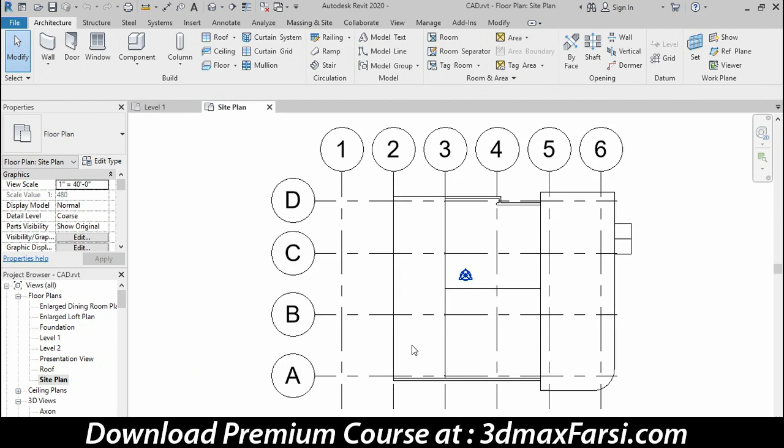So I'm going to switch views. I'll come over here on the project browser and go to my site plan view. You can see that it comes in at a much smaller scale, and I want to give myself a little bit of room to work, so I'll put my mouse in the middle of the screen and roll down a couple of clicks to zoom out.

To bring in a file created in another CAD program, we go to the Insert tab and we have two options: Link CAD and Import CAD. Generally speaking, Link CAD is considered the better choice, and one of its major advantages is that if the file I'm linking gets updated, I can simply reload that link and capture any of the changes.

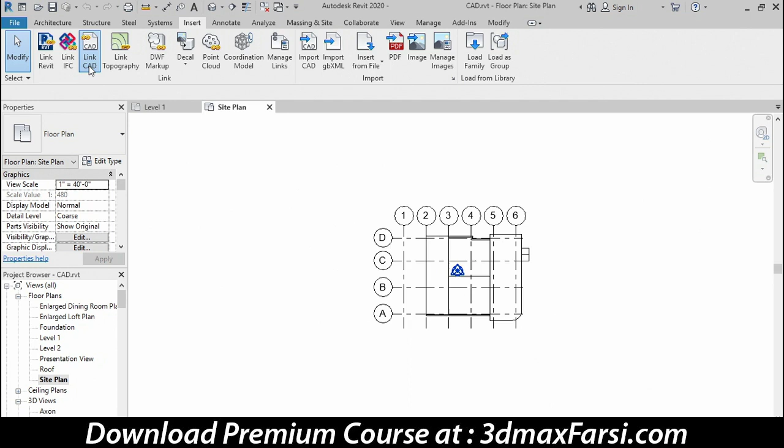So that tends to be a nicer workflow than having to completely re-import the data again. Let me go ahead and click Link CAD, and I'll select the DWG file that was sent to me by my civil engineer.

Now let's talk about a few of the settings at the bottom of the dialog. The first is files of type. I'm bringing in a DWG, but notice it supports many other formats as well, like MicroStation files or SketchUp files, so you can use the same basic method to bring in those files.

In the middle here there are several different settings. CAD files are typically in color, so here you could either preserve those colors or force them all to black and white. I'll accept the default and preserve them.

CAD files are typically organized into layers or levels. You can bring in all of those layers or some of them. I tend to bring in all of them, and then if there's a layer I don't want to see, I'll hide it later.

CAD files can be created in any unit of measure, so if you know the unit of measure you can choose it off the list here, or AutoDetect usually does a pretty good job. I typically default to that, and then if I need to scale it later, we can look into that.

Correct lines that are slightly off axis is a setting that tries to correct inaccuracies related to really long decimal place values. That can work pretty well for smaller scale files like this particular file, but if you have a very large, detailed site plan, you might want to turn this off because it might overcorrect things. I'll leave it turned on in this case.

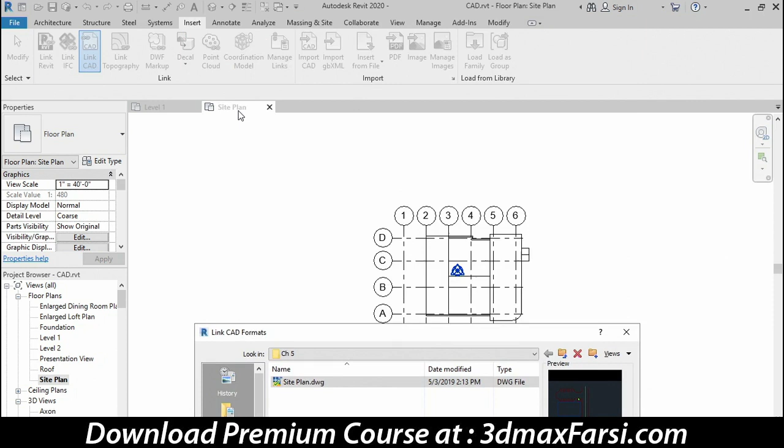Now, current view only is a really interesting setting. If I checked it, the CAD file would only show in the site plan view I have open, in no other view. If I uncheck it, it will treat it like part of the model and show everywhere—other floor plans, 3D views, what have you. I'm going to leave it unchecked, and I'll show you what that looks like in a few moments.

Now for positioning: if the two files have been coordinated with one another and share a common origin, then origin to origin can be a nice setting. These two files have not been coordinated, so the origin in the CAD file does not match the origin of the Revit file. You're welcome to try it and you'll see what I mean, then you can just undo. But in this case, I'm going to choose the more generic option of center to center.

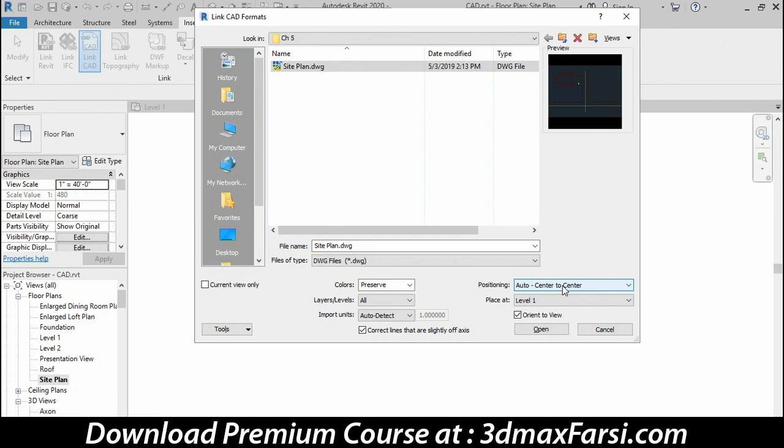Center to center is useful when you're not sure if the two files have been coordinated, or you're pretty sure they haven't, and you just want to make sure the CAD file comes in on screen so you can find it easily. It lines up the center of the CAD file with the center of the Revit project, and when I click open, it just drops right into the screen.

Clearly we now need to move this file because this site plan does not match the location of the building. This blue dashed box represents the property line of the building, so I need that to coordinate a little bit better with my building geometry.

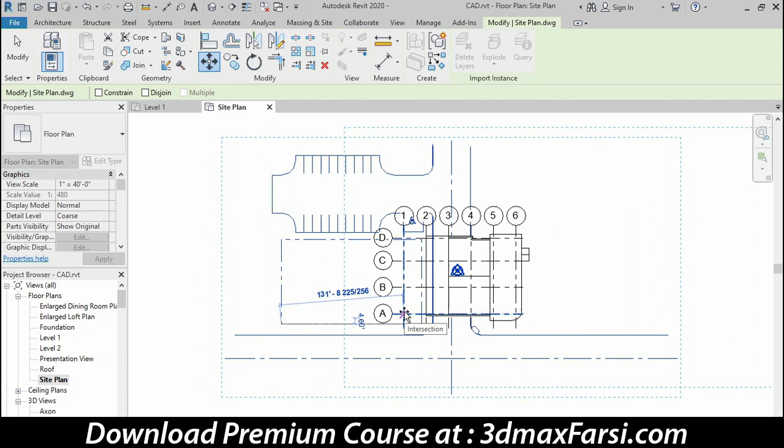I can click anywhere on the CAD file and select it, go to the move command, and start moving at some convenient start point. I'll pick the lower left-hand corner of this property line, then move that to the intersection of column grids A and 1, and click at that intersection. Let's zoom in a little bit.

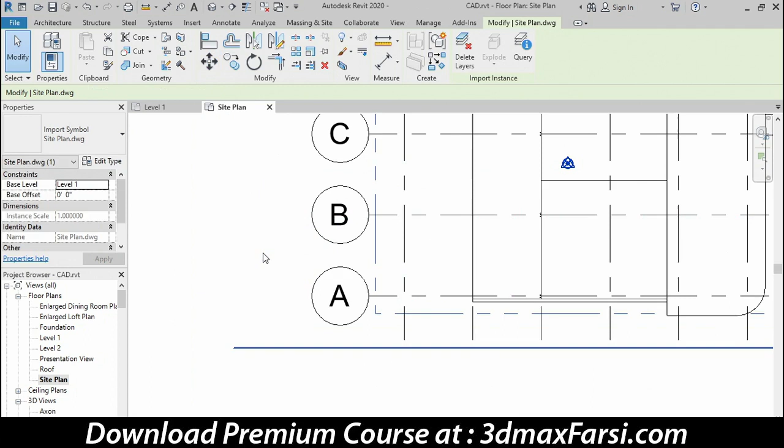I want to move it twice more. It's still selected, so I'll go back to move, pick any start point, start moving horizontally to the left, type in 10, press enter. Move again, pick any start point, move straight down, type in 6, press enter. I've now moved it both left and down so it's positioned correctly relative to the building—you can see that setback line now goes all the way around the building geometry.

Now I'm going to click anywhere to deselect the CAD file, and let's review the settings we used to bring this in. For colors, we preserved the colors, and you can see clearly that the information in the CAD file has come in color. We also brought in all of the layers.

If you want to see those layers, you can select the CAD file, go to this query button, and reach into the CAD file and touch the pieces of geometry. When you click on one of the items in the CAD file, you can see the layer that object is on right here.

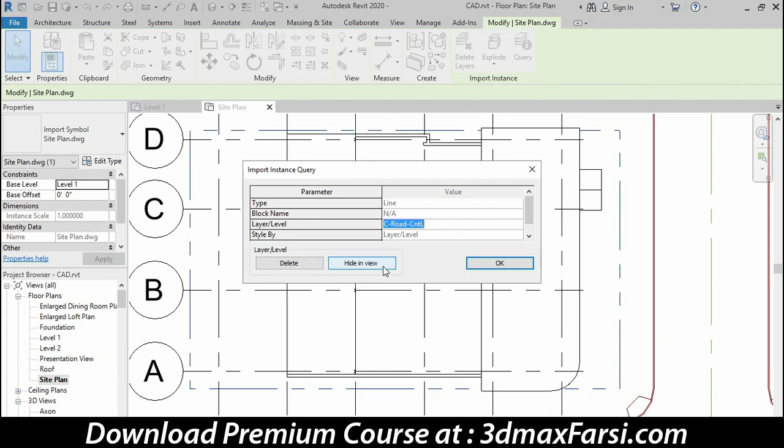Optionally, you can even hide that layer in the current view. You may recall I said if there's a layer I didn't want to see, I typically hide it later. I can do that, and you can see that green dashed line down the middle of the road disappears. I'm still in the query tool, so I'll click the modify command to cancel out.

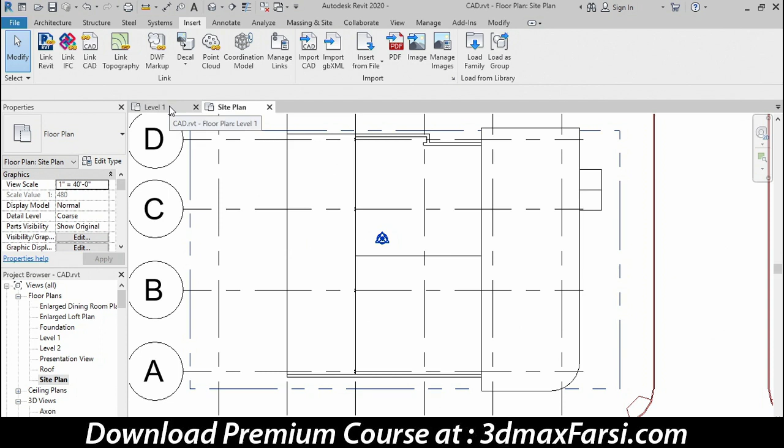We also made sure that current view only was not checked. To show you that, I can click back over here on the level 1 tab and notice the CAD file displays here as well. Had I checked current view only, it would only be visible in the site plan, but the fact that I can see it here in another view means that was unchecked.

In fact, if I go to a different view, like my default 3D view, you can see it displays here as well, so it will display everywhere in all views. Notice that the green dashed line is still visible here—so even though the file is visible in all views, when you start hiding layers, that's a view by view change. Just wanted to point that out to you.

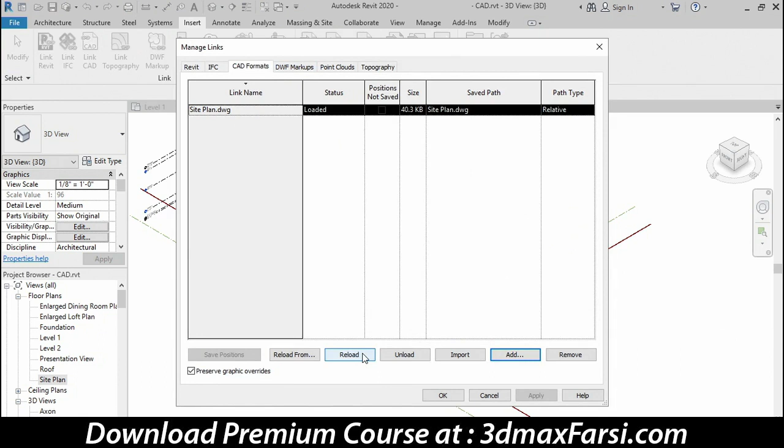Now, the final thing we mentioned is we started with the Link CAD button. That was significant because if my civil engineer sends us an update, all we have to do is go to the Manage Links button, click on the CAD Formats tab, select the file, and reload it. Then we'll capture any changes made since the last time we loaded that file.

So linking a CAD file can be a very convenient way to coordinate your efforts with folks working outside the firm or in other popular formats like AutoCAD. Anytime you need to do such coordination, you can use the Link CAD functionality and create a hybrid project team that's using both Revit and CAD geometry.